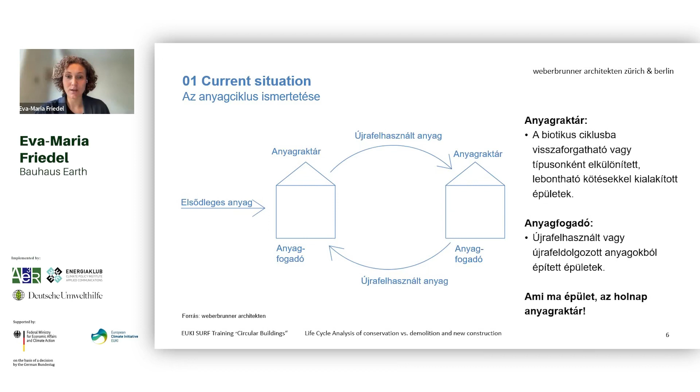Now about the life cycle analysis, I would like to show you how we were doing the calculation. There are a lot of rules and laws, and of course they are a bit different from country to country, but many things are also similar.

So the LCA is the life cycle analysis, or also life cycle assessment. The aim is to take a holistic view of buildings, of the entire life of the materials - production, operation, maintenance and deconstruction. It can be considered in relation to 13 indicators, but in this study we were focusing on the global warming potential, the GWP. We were also thinking about the carbon storage for bio-based materials, which is very interesting because you could store carbon in buildings for a while.

We didn't consider the operating energy, so it's just the focus on the construction, and the observation period of building life was 50 years, which is also a rule for the German LCA. In Germany, we have the ELCA tool, which is an open source tool, and there you can make the LCA based on the data sets of the Öko-Baudat.

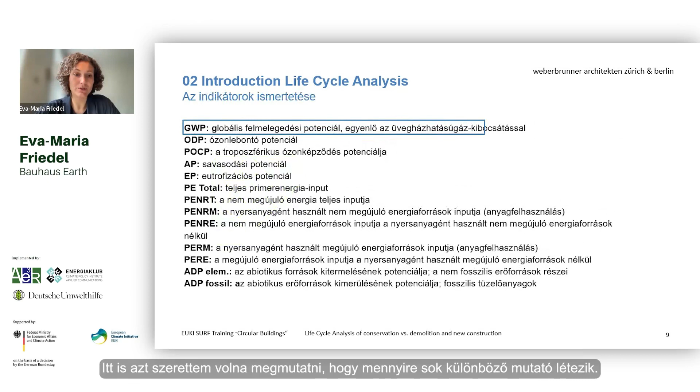Here I wanted to show you again that there are a lot of different indicators, and we are just focusing on the first one, the global warming potential.

Something important when talking about life cycle analysis are the modules. You see module A, which is the part of the production. Then module B, which is the use, and module C, which refers to the end of life. And also we have D, which are the credits and loads of reuse, recovery, and recycling potential. In Germany, we are focusing on the ones which are black when doing the calculation. The others are considered apart, but not included in the numbers we'll see later in the presentation.

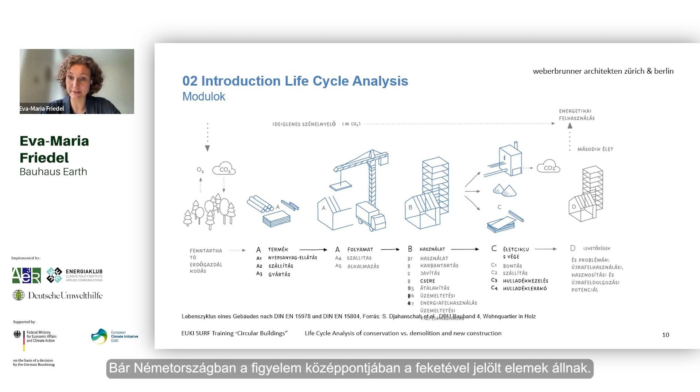Now coming to the example of this life cycle analysis of the facade refurbishment. This is the building we were analyzing - a very high, 9 story building in Berlin. We have high fire protection to think about because it's such a high building. It's a brickwork construction with sand lime bricks, and at the moment it's uninsulated. The gross floor area is 12,600 square meters, and the facade area around 7,000 square meters.

There is also a thermal insulation standard we have to reach, which is more or less 0.2 watt per square meter Kelvin.

So then we were focusing on different scenarios. The first one was the demolition of the existing facade and a new construction of the conventional facade. You have to think we were just focusing on the facade, but of course it's something you can also scale to the whole building - in the end we have numbers which you can compare. So that's the first scenario - what happens if I do a new construction with conventional material?

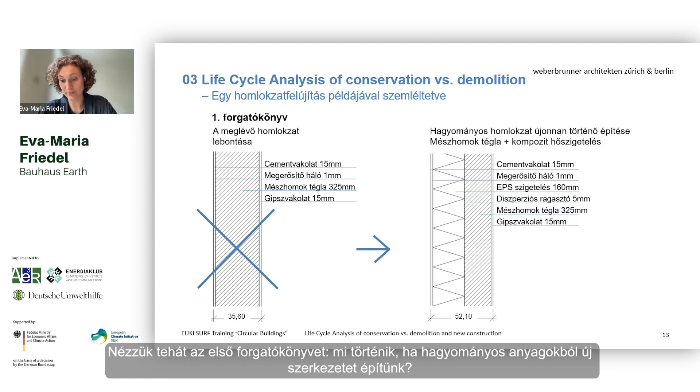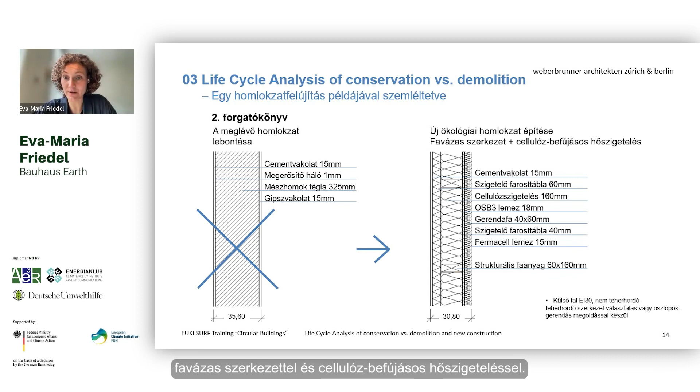The second scenario is I will demolish the existing facade and put a new building, but an ecological facade - a timber frame construction with cellulose blow-in insulation. Scenarios 3 and 4 were what happens if I do a refurbishment instead - I let the old facade stay and put a new insulation in front of it. Scenario 3 is a conventional refurbishment, for example with styrofoam, and scenario 4 is a complete bio-based construction.

Here you can see the results of the LCA, of the global warming potential. The first two are very, very high. In the gray you see the gray emissions the old building or facade already has, and the red one on top is for the new construction. In the refurbishment scenarios, you see that you can save around 79 to 89% of the carbon dioxide emissions.

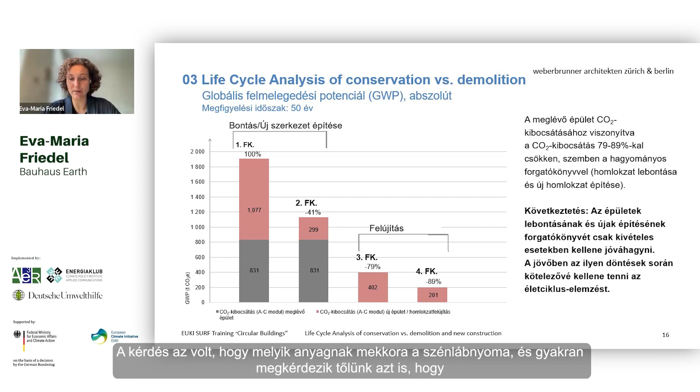The demolition and new construction emissions were so high comparing to the refurbishment, we then focused on different scenarios of the refurbishment. So what material has which carbon footprint?

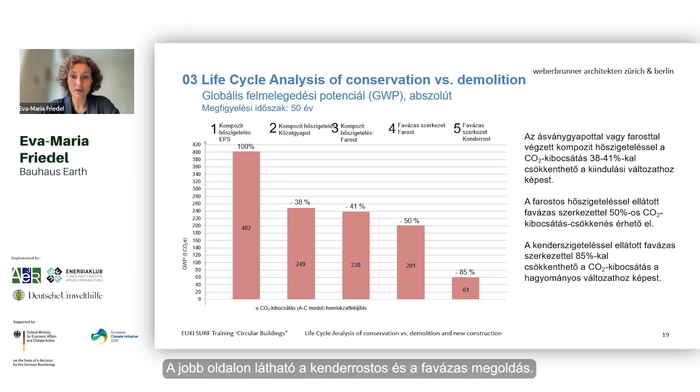We were focusing also on the carbon storage capacity, not only the global warming potential. In scenario 1 and 2, you don't have any carbon storage capacity since we have just synthetic and mineral materials. In scenario 3, you have a bit because we have the wood fiber in the facade. And in scenario 4 and 5, we have a lot of carbon storage capacity, like our timber frame, which can store carbon.

Then we compared the 5 different refurbishment options across different indicators. First the global warming potential, then the carbon storage, the cradle to cradle, so can we put it back easily to the circularity, and then also the ecology, so are there any glues or pollutions in the materials?

On the left side, we tried to evaluate this with a traffic light system, and you see that everything is red. So the composite with the styrofoam has a lot of carbon dioxide emissions. We don't have any carbon storage. It's very difficult to recycle and reuse the materials because we have this composite which is glued. And of course, we also have a lot of pollutions in the different materials. In Germany, it's very common if you have styrofoam and all these glued materials to put it sometimes to landfilling and not recycle it anymore. Especially this is also the case with rock wool.

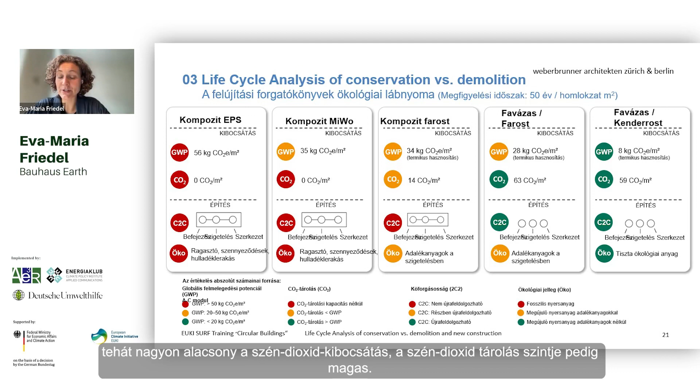On the right side, you see the bio-based solution, and here everything is green. We have a very low carbon dioxide emission. We have a high carbon storage in the materials. We can reuse it if we are thinking in plugging, doweling, and screwing when we are doing the construction. And also the hemp is a pure ecological material without any additions.

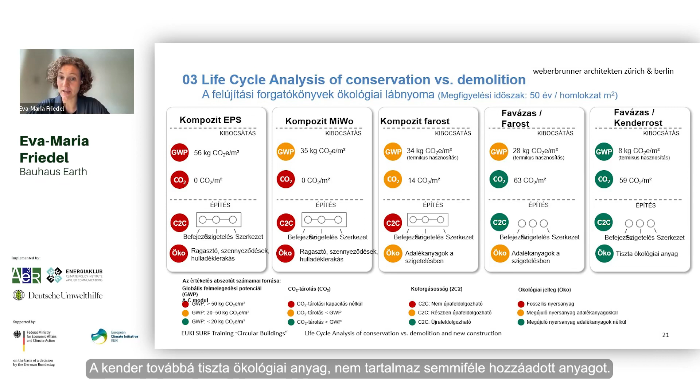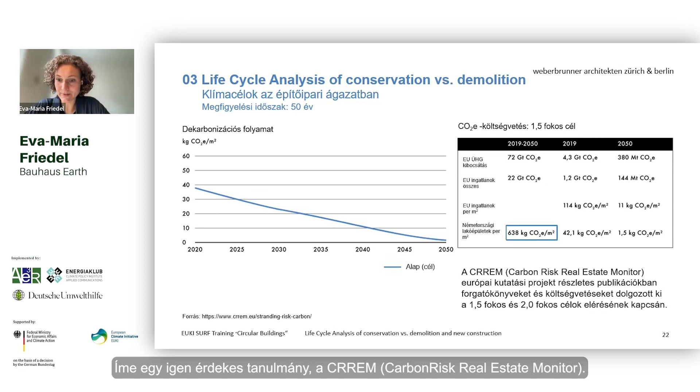So then in the end, as already mentioned in the introduction, we want to try to be climate neutral in 2050. This also, of course, refers to the building sector. There's a very interesting study, the CRREM study, Carbon Risk Real Estate Monitor study, and they were focusing on different scenarios for how to reach the 1.5 degree and the 2.0 degree goals. It's possible to get the number for residential buildings in Germany, which here is marked in blue. The calculation says that between 2019 and 2050, we still have 638 kilograms CO2 equivalent per square meter.

And of course, this graphic is falling, so every year you have less. In 2019, you have 42 kilograms CO2 equivalent per square meter, but by 2050 we already have to be more or less climate neutral. With this base, we tried to compare our facade solutions and put them against the 1.5 degree goal.

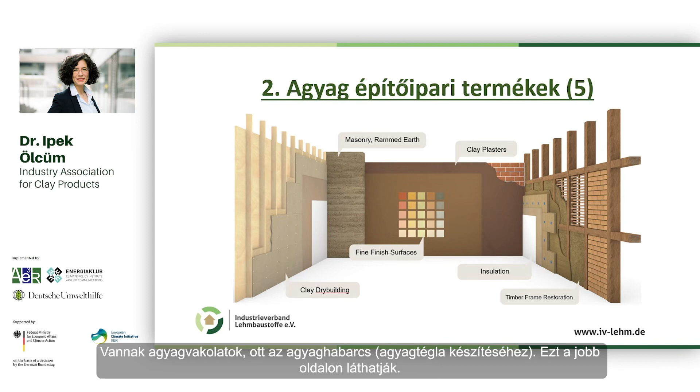You have this view into a room where you can see all the materials you can use: clay dry building, masonry, rammed earth, fine finish surfaces in any color you want - we prefer the natural ones because you don't have to add anything else to it. Then you have clay plasters, clay mortar to use clay bricks which you can see on the right side, and clay building materials for insulation.

Eva Maria talked a lot about timber frame - you can use clay in timber frame restoration, but also for new construction buildings in timber frame as well, very well. So it's not just restoration. In all of these fields, conventional building materials are well known, and we're trying to get the sight into clay building materials.

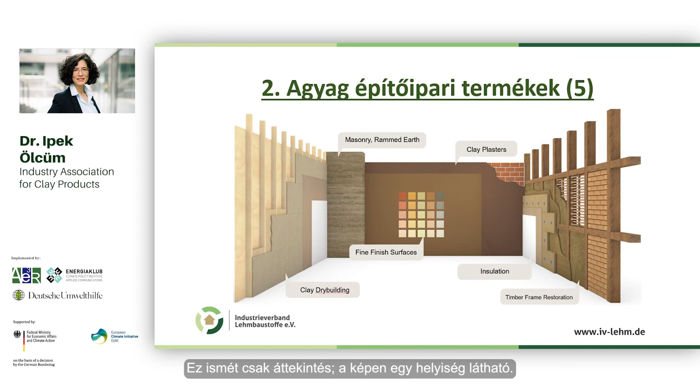This is again just an overview, just a view into a room. So there are a lot of variety of clay buildings. I would say there are 5 main products. You saw already all of them.

In Germany, that's the point where I would like to recur: you have clay stone and clay brick, and clay brick is standardized in Germany. You have the standard DIN 18945. Very important is that the products are always air dried, so you don't have a burning process, which is very high in emission. So you can use the bricks, which are air dried, inside and outside.

We have a load-bearing code according to Eurocode 6, which says that you can build buildings in Germany with 4 floors up to 13 meters high. You have for sure standards again for plaster and mortar. Clay paint is not standardized, but you don't need that.

Clay dry building is the green alternative in drywall construction. We are there, we need to be seen. The timber construction industry sees us. We have a lot, you have something to do and to change in the German regulation to get our place as an alternative in the field of using dry wall constructions.

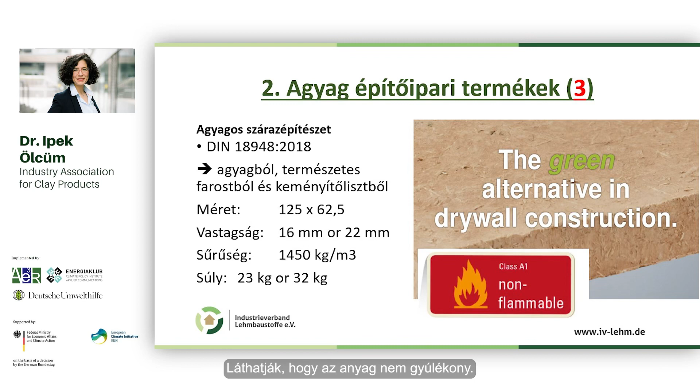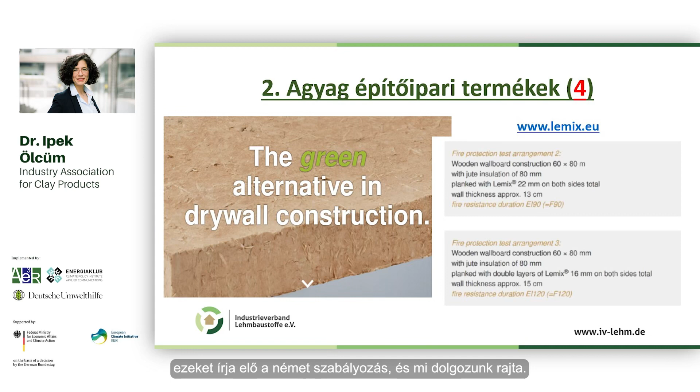You can see we are non-flammable. You can see here further some arrangements made by some companies of us about the fire resistance duration. You have the fire resistance duration EI90 and EI120 tested. We need some tests more. That's what the German regulation asks for, and we are on it.

Why we should use clay building materials: as I showed you already, all the materials which you can use when you build up or when you renovate buildings - you can show that on 2 hands. We are very low in energy according to production procedure, because we are air dried. We are recyclable, reusable as well, regionally available, German-wide and Europe-wide, and I would say worldwide.

Sound absorbing is one of our construction physical advantages. We are moisture regulating. This is a real point where timber construction and clay products go very well hand in hand, and you can see that in buildings built all over the world 50, 100 years ago. You have the pollutant regulating factor of clay products. They are heat storing, and they protect from heat in summer because of the heaviness of these products.

So here just a few success stories. This is the Federal Ministry of Agriculture, Food and Consumer Protection in Berlin. And they use dry building, about 4,000... 2,000 square meters of dry building.

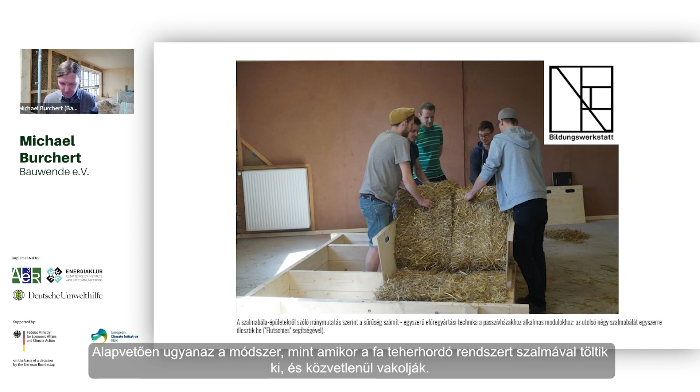The trick is to make it gapless and settlement free by using pressure. You actually don't need any tools for that, you can use tools, of course, but you don't need this. And the trick is to have a density of around 100 kilos per cubic meter. This makes it very safe. And here you see engineers training in our practice hall, learning this.

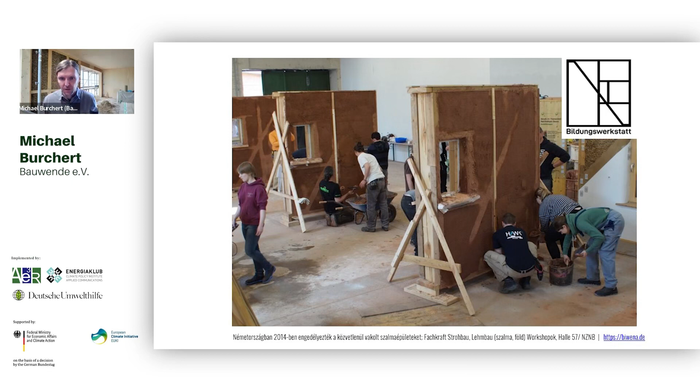Yeah, it's directly plastered, that's a trick. This is the air and wind tightness.

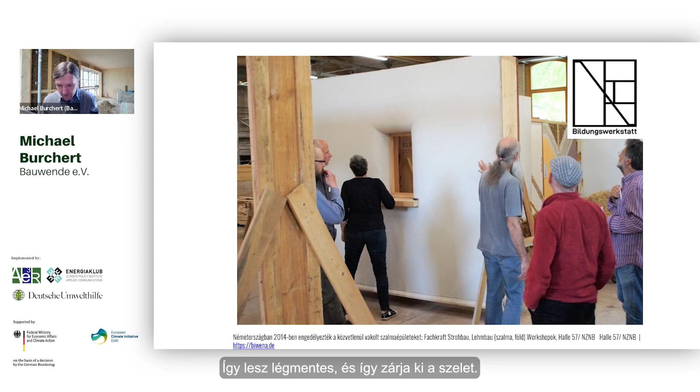Here you see the finished building. This is the North German Center for Sustainable Construction. It's 5 stories high and it's built with straw, clay, earth, and lime.

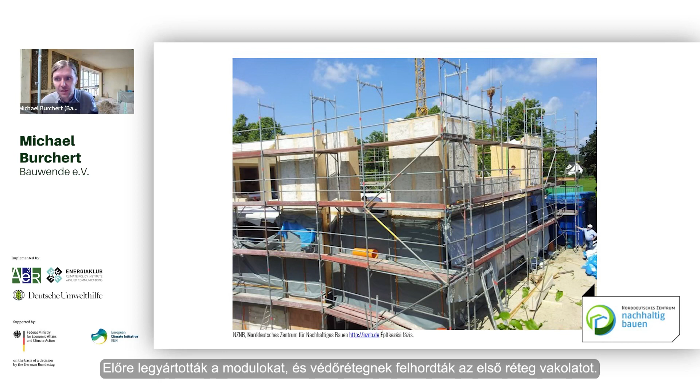And this is how it's made. You saw the pictures before where the students were practicing this. Here, 2 guys were practicing in the same hall you saw before. In 2 months, they built the whole house. Basically, they prefabricated these modules, and they applied the first layer of plaster, as you see, as a protection. And it's just stacked over each other, and boom, there's the finished house.

I mean, it's very easy. It's very easy to build, very fast, if you know the trick.

So yeah, we also showed this for the last maybe 10 years or so, also in vocational schools around Germany. We have thousands of people that can basically do this. We had 2 days with hundreds and thousands of people usually, and basically this is ready.

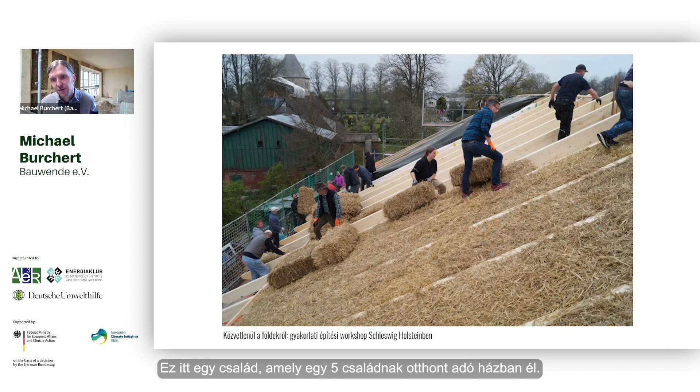And we also did this on training on actual construction sites. This is the builder's family from a 5 family home. They helped after a brief introduction, like 45 minutes or so, and they can do this in a quality way, and it saves a lot of money actually.

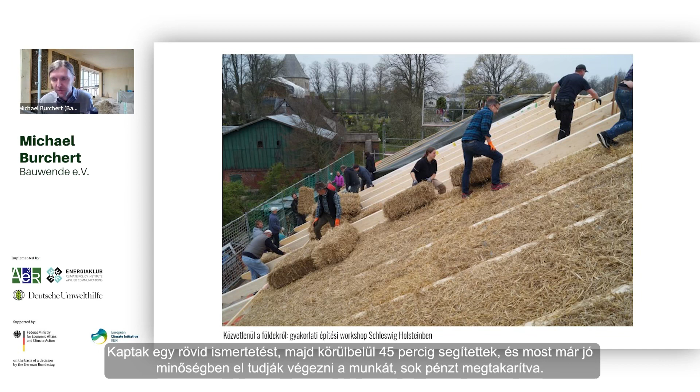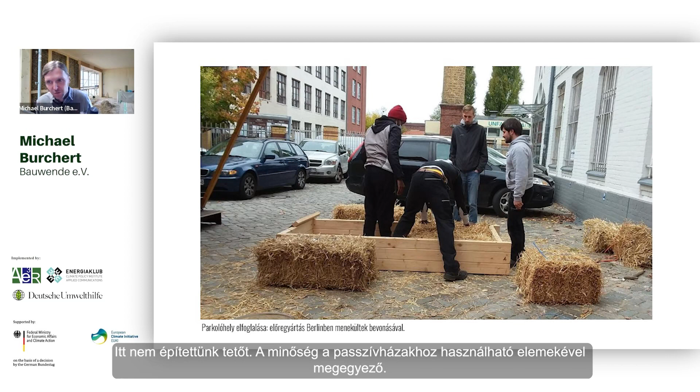Here we did this in Berlin on the street with refugees, like occupy parking space, right? Just no roof and quality passive house ready construction.

And why are we doing this with straw? I mean, there are so many construction materials, right? But we have problems, right? Our budget is actually our climate budget for 1.5 degrees is actually depleted in 3 years in the EU and UK together. So we have to act, and we can actually.

I mean, you see it behind me. This is an old technique, and it just works, and it gives super high performance buildings. And yeah, still why straw?

There's so many other ecological things around, right? Yeah, but the best building material is the one that does not have to be produced. It's already available. That's a trick. And it's everything there, not just the material, also the research is done.

I mean, it's passive house ready, it's certified. You have all your whatever heat bridging and so on. Everything is there in detail. You even have your BIM models ready. It's almost completely open source, this technique, and it's super ready.

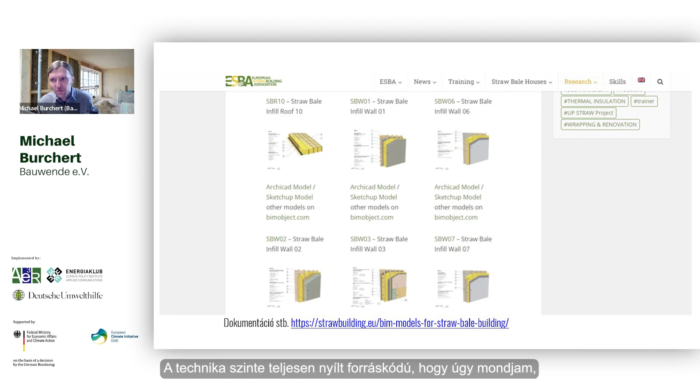Yeah, but for those who can't build with straw, don't worry. Other plants have also beautiful fibers, right? There are a lot of plants worldwide. We saw hemp already. But if you look at whether we have enough - this was a question from the chat as well - I have to say yes, we have enough, but not from all species. Let's put it that way.

And well, we have a lot of woody, not wooden biomass, but woody biomass, which I mean straw and hemp and so on. This is basically also woody biomass. It's the same, basically the same as timber from the forest. It's also cellulose, hemicellulose, and lignin and other stuff.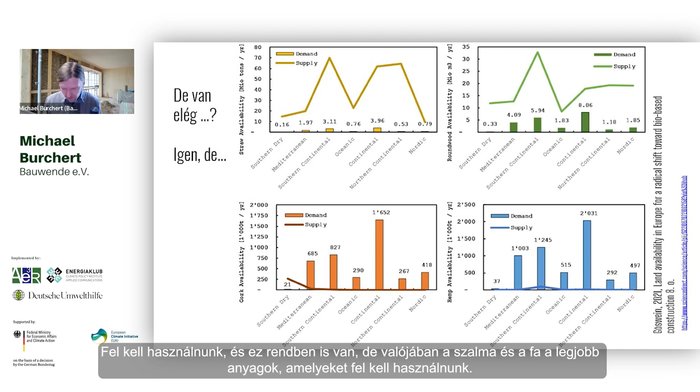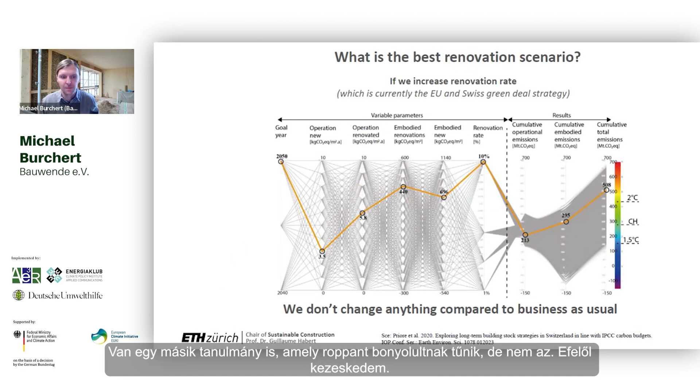Now, so here's homework for you. You get the presentation afterwards. You can look at your national straw potential. I prepared this document. Yeah, another study looks super complicated, but it is not. I guarantee you. This is by Guillaume Habert.

That's a great guy from ETH Zurich. He looked at how Switzerland can stay within its 1.5 degree budget. And he looked at construction, obviously, and he looked at the business as usual scenario, and you see that it goes well beyond 2 degrees, so it fails.

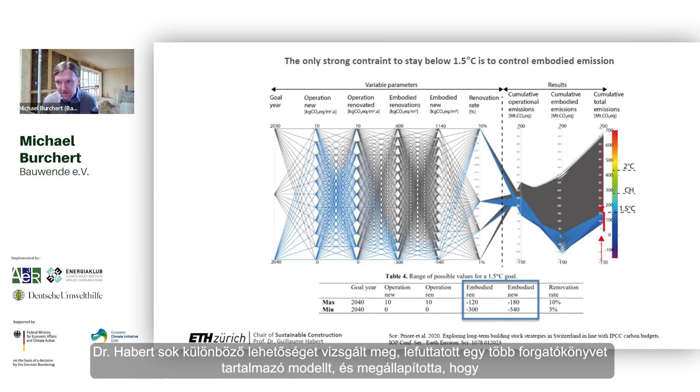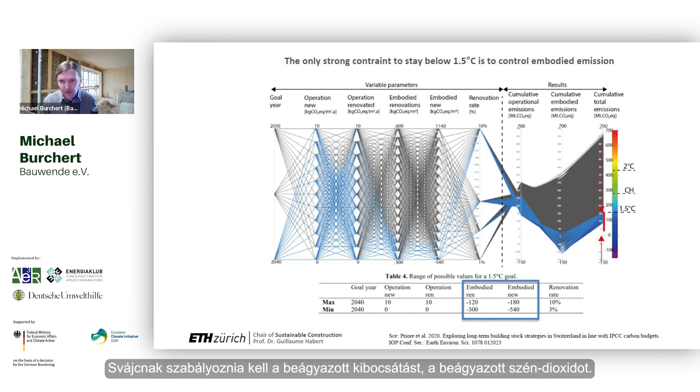So if Switzerland continues to build and renovate like that with usual materials, it doesn't work. So he looked at many different options. You see this is very complicated. He ran this model with several scenarios and so on, and he came to the conclusion that Switzerland has to control its embodied emissions, embodied carbon. There's no way around it, you have to limit that. So how can we do that?

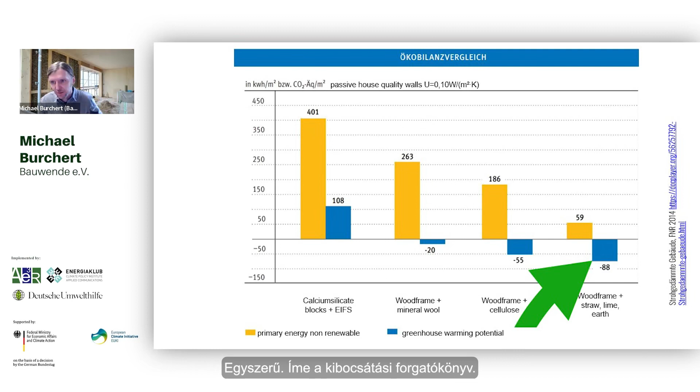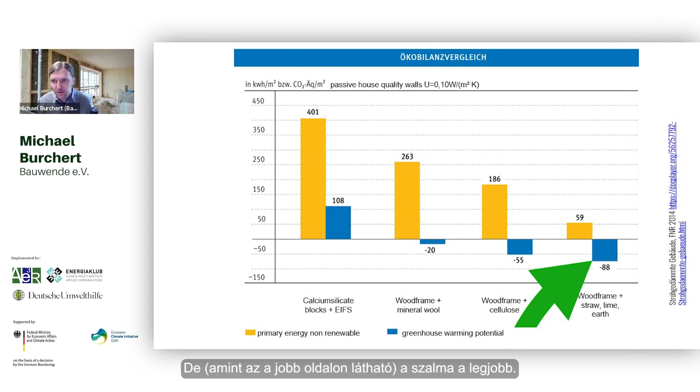We can ditch the bad stuff and go to the best performing things. This is pretty easy, I mean a child would come to this conclusion. We have this emission scenario, they go up, and we focus on the things that go down. You have several options, but straw is the best one, as you see on the right. You have 88 kilo sequestration, storage, CO2 storage in the building.

Hemp does this as well, but there are some differences there. This is not optimized for sequestration, by the way, you can store more. And this is also with lime, which is emission as well. This storage thing is interesting because when you have negative emissions, or let's say climate positive - there's a bit of a bad wording there - you can use these emissions directly in the building to offset things. Maybe, I mean, we can discuss this.

You can even do an optimized reinforced concrete building and have super thick walls to compensate for that - 1 meter thick walls to compensate this. I mean, do not do this, do it rather with timber. But timber is also just not really a climate positive material, at least mass timber is not, at the moment. And you have to compensate this with 30 to 60 centimeter straw bales, which is okay - this is a normal straw bale size.

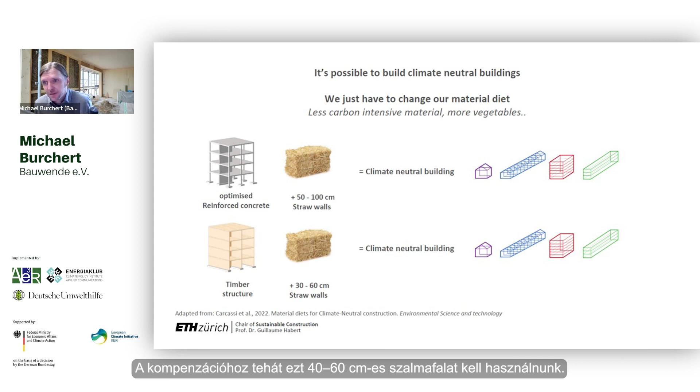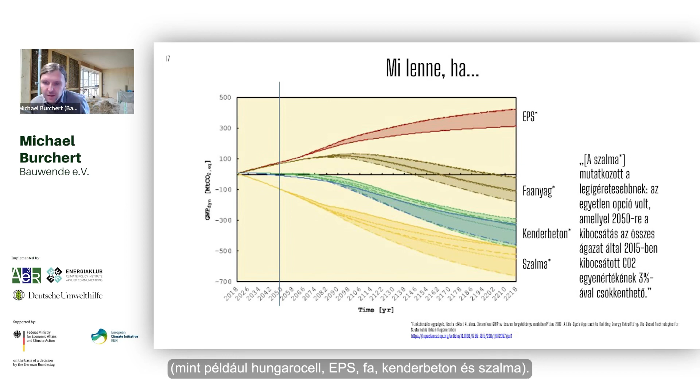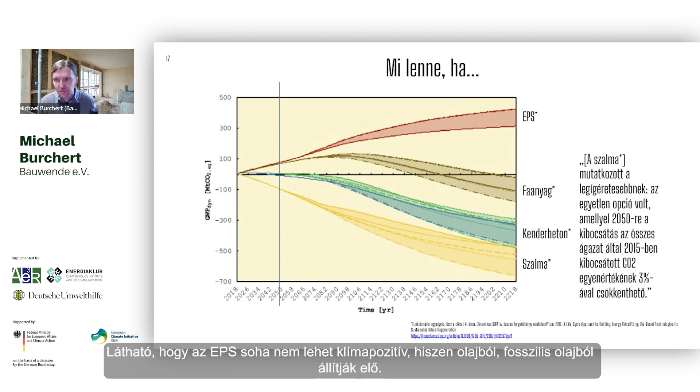And here you see that EPS can never go climate positive because it's just an oil product, a fossil oil product - it's just emission. And you look at timber, this is the brown thing, and you see it dives under zero very, very late - I mean 2150 - because a tree obviously needs to grow back to its former state. It takes a long time.

And you see that hempcrete is neutral, let's say, for almost 100 years, and then it starts to dive really, really good. This is because there's a large lime part of this, and straw doesn't have that. It can have that if you do a plaster and so on, but you don't have to. And straw is directly positive, so to speak, after 1 year, because its crop grows back, like hemp.

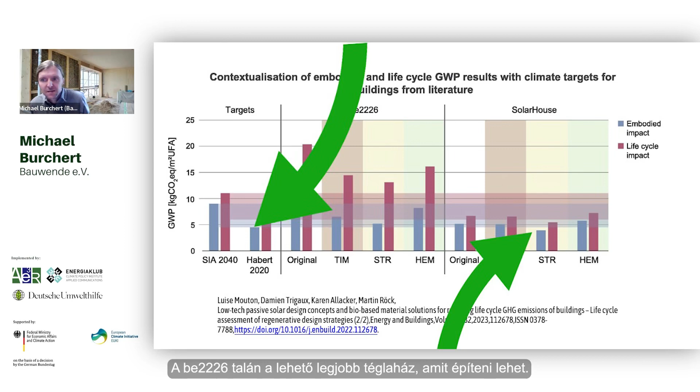Another study - I don't want to bore you, but this is really interesting stuff. We have two buildings compared here: the be2226 and the solar house. The be2226 is maybe the best brick house you can build, a brick house. These are larger houses, multi-story. The be2226 doesn't need heating, and the solar house is a straw house. So, and the first bars...

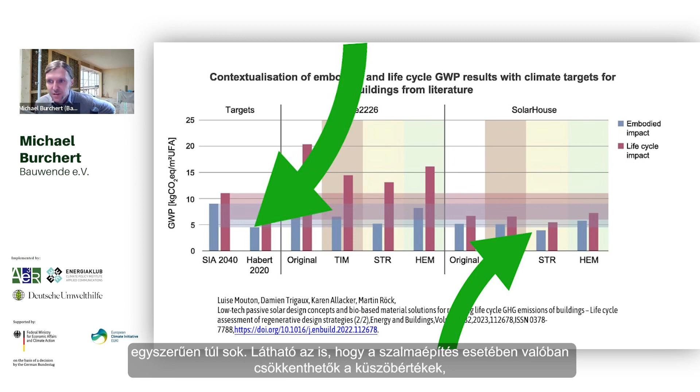Guillaume Habert did research on what the sustainable budget for construction, for new construction, should be, and he found these values to be in line with sustainability. There's also the SIA target, a Swiss target for limiting embodied carbon and whole life carbon. You see that the brick building, the 2226, is too high - the best massive building, basically with fired brick, can't achieve this. This is just too much. And you see that for the straw building, you can actually lower the thresholds - you can even go below that.

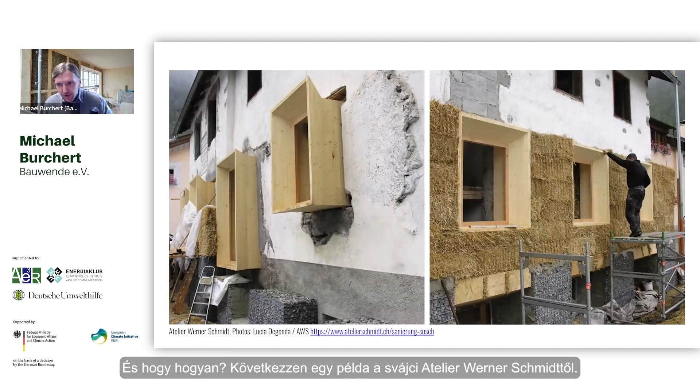So, how to do that? Here's an example from Atelier Werner Schmidt in Switzerland. You can do it like that - just put the bales at the wall. This is called wrapping, and it's plastered, and boom, you have your passive house wall. This is great for summer and winter performance. This is a usual bale, and these are very thick ones. I guess these have around 16 hours - they add 16 hours of amplitude dampening, so you won't ever have a temperature higher than 23 degrees or so in summer, even in a heat wave.

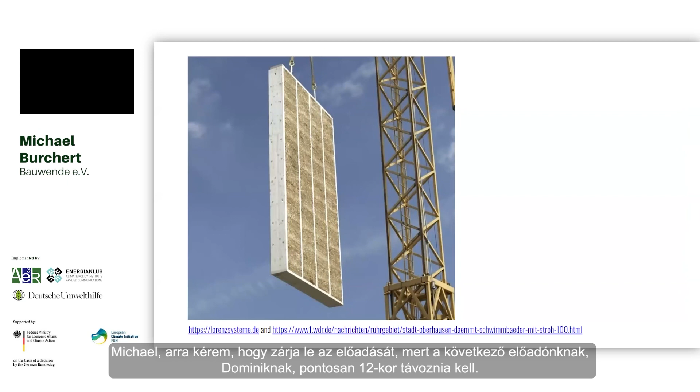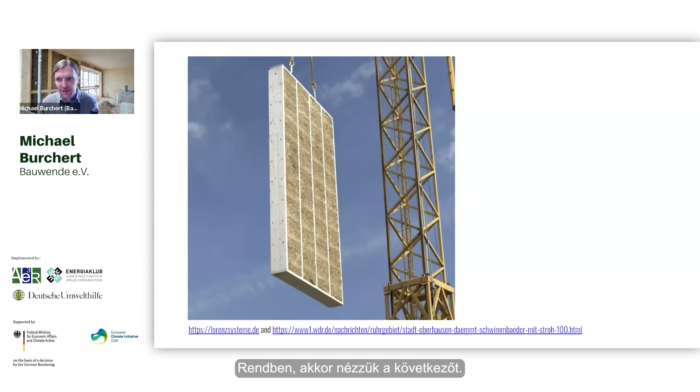Okay, so I will just hop through the next one. You don't have to do this by hand—you have a lot of prefabrication already. You can really order your panels, as you see. This is Oberhausen, where they retrofitted 5 swimming halls with this, easily. You can see it's just bolted on, and there you have your swimming hall.

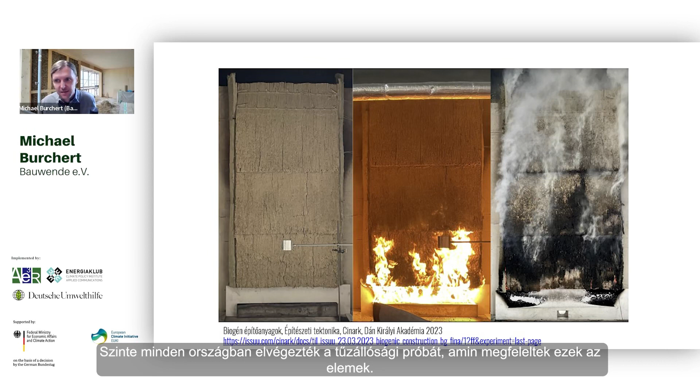Here's in Paris, 3 kilometers from the Eiffel Tower. It was retrofitted, just strapped on with belts, tie bands from logistics, and plastered. This is fire tested in almost every country, and proven.

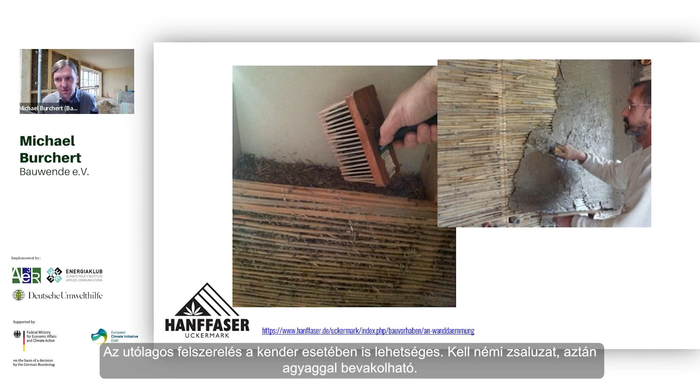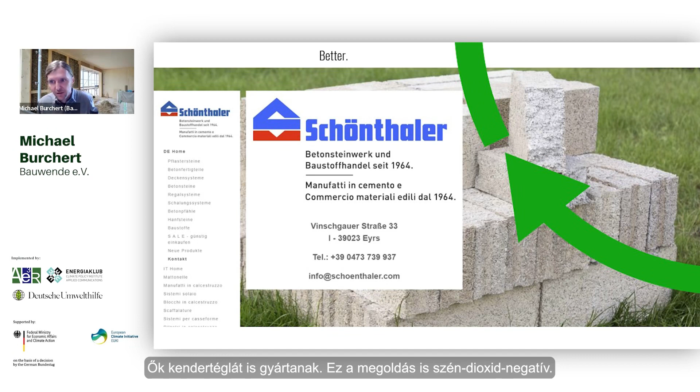You can retrofit with hemp, obviously. Just have some shuttering there and plaster over it with clay, and you're good. You have your industry that's also ready—your concrete industry, they do hemp bricks, no problem. Where's the problem? Same infrastructure. It's carbon negative as well.

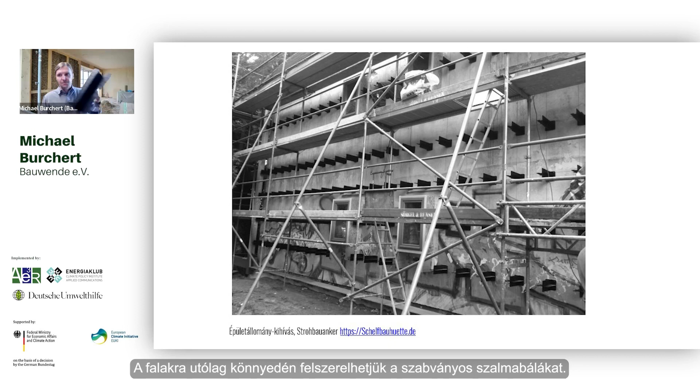You can have your WDVS, your external wall insulation system, plaster over it, ready. You can have your walls easily retrofitted with bales, standardized. I have this console here that you can screw on the wall, and you are good. This is pretty easy, it's pretty doable.

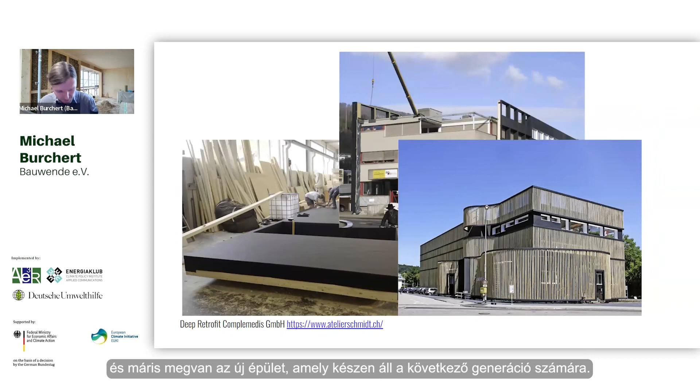This is the finished house. Or do a large scale industrial retrofit—just do large modules, crane it in place, and you have your new building ready for the next generation. Thank you.

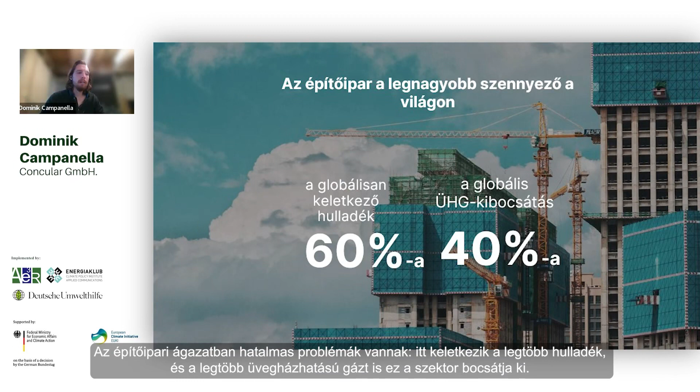The problem, I think, was explained already quite often before. We have a huge issue in the construction sector, as we have the highest amount of waste and also GHG emissions. The big issue is the waste principle, right? We take resources out of the earth, we produce materials, we put them into buildings, and sometimes after just a couple of years, we take these materials, which are really high quality, and we throw them away or we downcycle them.

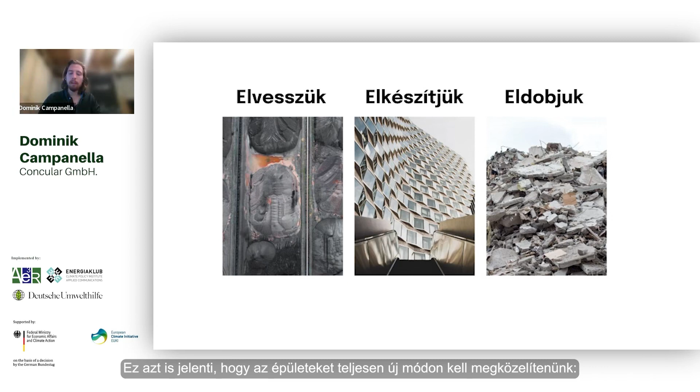This cannot be the case anymore, because we have to change—we have to think in circles. That also means we have to look at buildings in a completely new way, as a source for new products and new buildings. And as already mentioned, we have to actually follow the circular economy principles.

We discovered that already more than 10 years ago. And what we thought was, okay, on the one side, buildings are getting deconstructed. On the other side, we need these materials for new construction. So why not match supply and demand? Why not build a marketplace where people who have materials as leftovers from deconstruction can put it in and others can buy it? So we founded Restado, and we built it as the largest marketplace for circular construction in Europe.

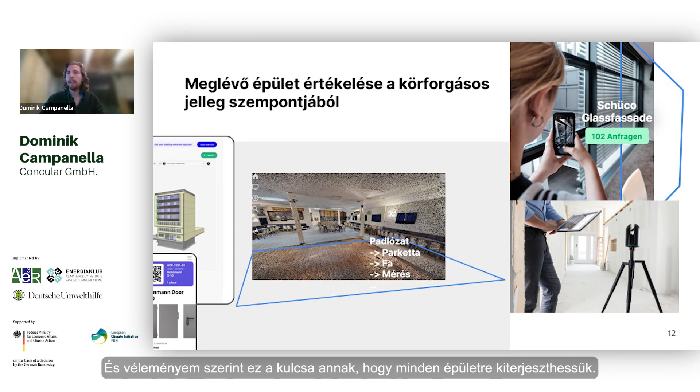But the big impact also lies in existing buildings. So how can we reduce or digitize materials in existing buildings? For that, we developed software which you can put on your phone and go through the building. We also do 3D scans, really looking with a 3D scanner and a kind of computer vision algorithm at what materials are in a building, and then automate this process. Because when you think about digitizing materials in existing buildings, that seems to be a large task. But with software, you can reduce this complexity and make it very simple. And I think this is key to scaling it to every building.

And then in the end, it comes down to data, right? So what we did at Concular was to build a large database, also partly from ÖkobauDat, a German database where we have a lot of information about how much GHG emissions, or different kinds of emissions, are used in the production of some materials, so the embodied carbon, but we also have data about the circularity.

And what's a really interesting aspect is when you take these materials and sell them at the end of the lifetime of the building, instead of paying for landfilling, you make something valuable out of the cost. So you can actually make money with the circular economy. This is something really interesting.

When you put all this data together, you have a really good picture of what kind of materials can go where. Because when there's a renovation or deconstruction happening, we match the supply of all the data with the demand of manufacturers, recycling companies, building owners, and so on, to really close the material loop. And now, of course, a big point is also, can we do that from the construction site to the next construction site?

This is often not the case. I mean, we are working a lot with manufacturers. We're taking it on their side, refurbishing it, and then selling it again. But sometimes this is also not possible.

This is why we strategically now go from the digital space also into the physical space, creating so-called urban mining hubs. So we opened one here in Berlin, which is 1,000 square meters of storage facility, in cooperation with Alba, a disposal company here in Berlin, and also the Senate of Berlin. And we will open many more of these facilities in Germany to enable us to circulate even more materials. These storages are also completely run digitally.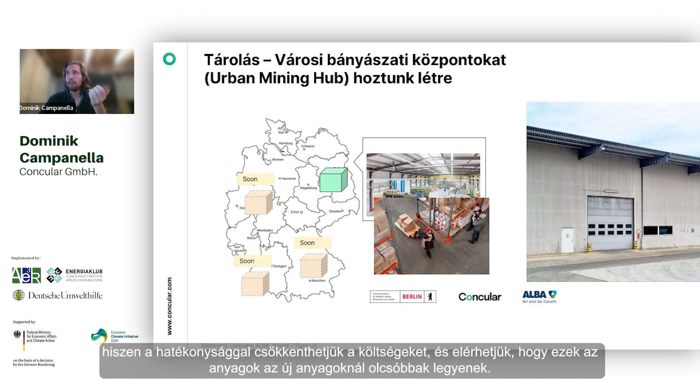So we have a software behind it, which is connected to our system to have no friction in between, to make the process very efficient, because with efficiency you can reduce the cost and make these materials cheaper than new materials, but with the big advantage that they have much less CO2.

Now, this is all nice, and this is what we've done at Concular, but we want, of course, that others are doing that too. And this is why we created a DIN norm, or DIN spec, for it. It's called DIN spec 91484, so-called pre-demolition audits, where we standardize the whole process of what I just explained. It's free to download, everyone can just apply that principle. It's also available in English, so you can just search for it and download it in English.

This is what we've done with 30 stakeholders in the construction industry, a lot of universities, but also practitioners and so on. And with that, there are two purposes. One purpose is that others can just do it also. But the second purpose is, in Germany, you can just demolish buildings without any permission, and I think this is not good. We have to really check before demolition, is there really a reason for demolishing a building, and what from the building can we really put back in the circle again?

So this is where this DIN spec is going into, and the plan for that DIN spec is to make it also a European norm. Of course that can take a while, but I think this is a first good step.

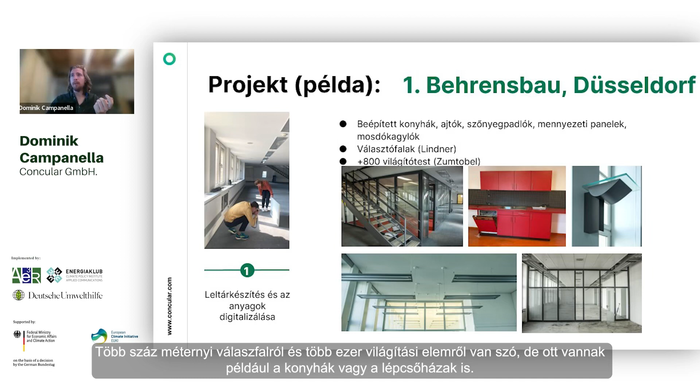So a lot of the materials were digitized. You can see, of course, because it's interior material, we have a lot of partition walls, we have a lot of these lightings, hundreds of meters of partition walls and thousands of lightings, but also things like kitchens or stairways and so on. And then what we did was go to all the manufacturers and create take-back systems with them, especially Lindner.

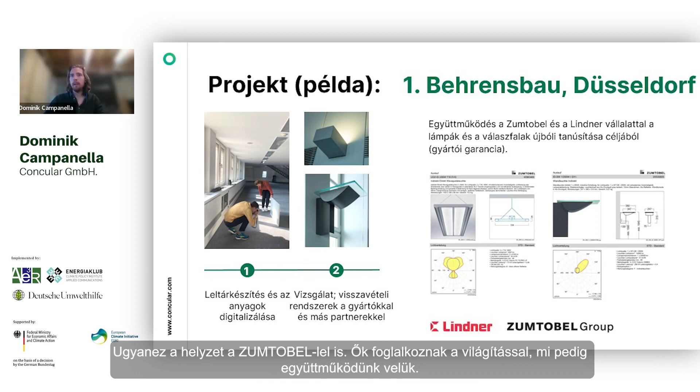Lindner has its own production line for reclaimed construction materials. They take these materials, refurbish them, and sell them again. It's the same with Zumtobel, who does the lighting. Working together with them and ensuring good quality, we were able to put it on our platform.

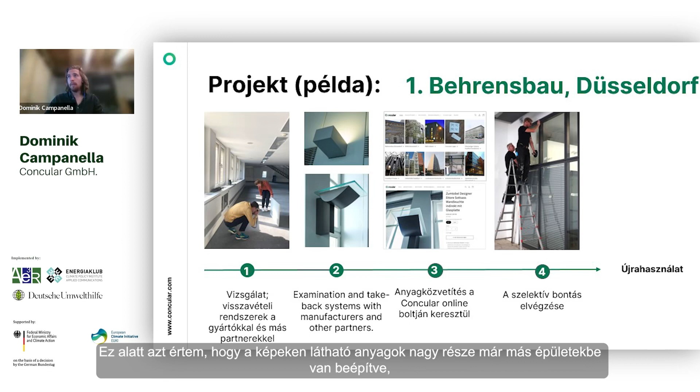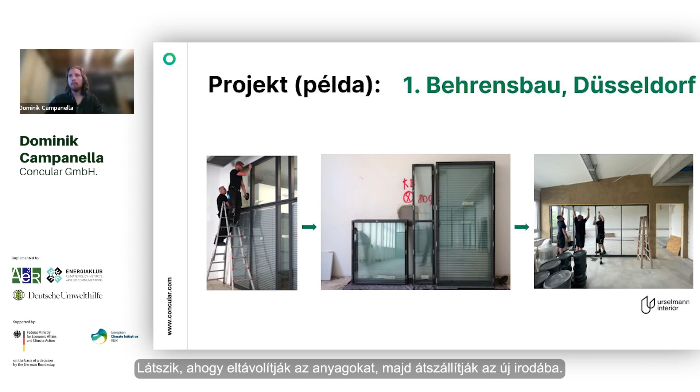You can also see how these materials were then put into another building. Most of the materials you just saw in the pictures are already part of other buildings now, which I think is a really big win. For example, here is how they put it out and transport it to a new office. You can also see how kitchens were put into new buildings, or these doors which were used, unfortunately not as a door anymore, but at least as something to sit on.

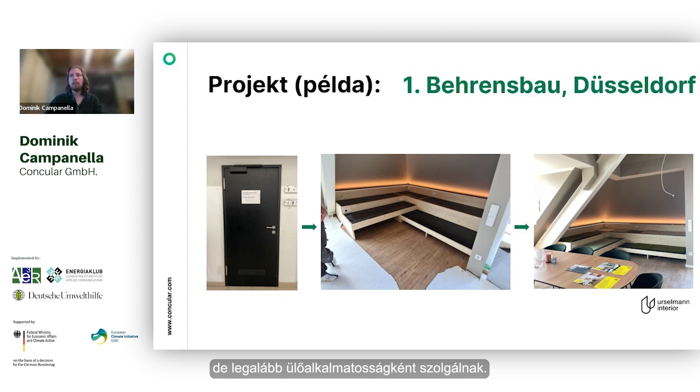Another example would be a discount supermarket chain we work with in Germany. For all their supermarkets, they always have the same wooden structure, and these wooden structures are quite good. What we do is put them out. Some of these wooden beams you can use as wooden beams again, but some of them, how to say, cannot be used directly again.

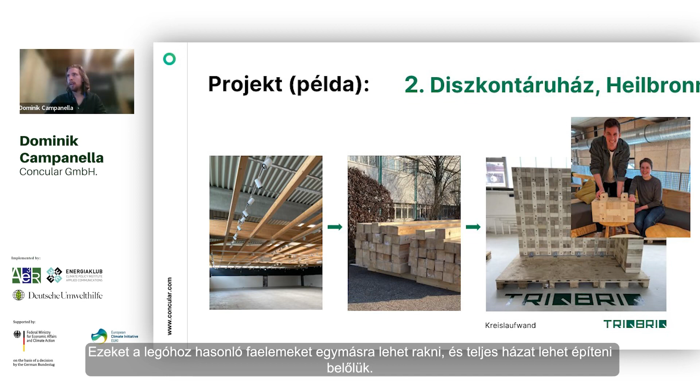So what we're doing is working together with a company called TriQBriQ, and they make so-called bricks with that material. Basically it's like wooden Legos which you can stack. Then you can build complete houses with it. So out of these wooden beams, a house was built. The really good thing is that you can just take them out - if the house is not needed anymore, you can take them out as Lego stones and use them somewhere else. From sustainable materials like wood, we give it a second life as a new product, and it can be used again.

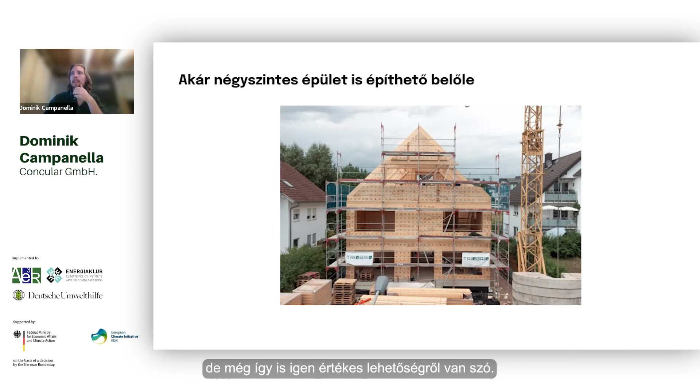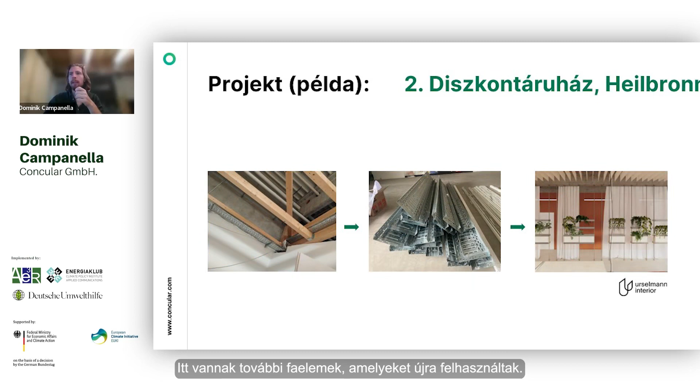This is, I think, a good example. Of course it would be best to use a wood beam as a wood beam again, but this is also a possibility for high value use. You can also see that other stuff was made out of the wood, and these were also used again. So everything that was part of it was used again.

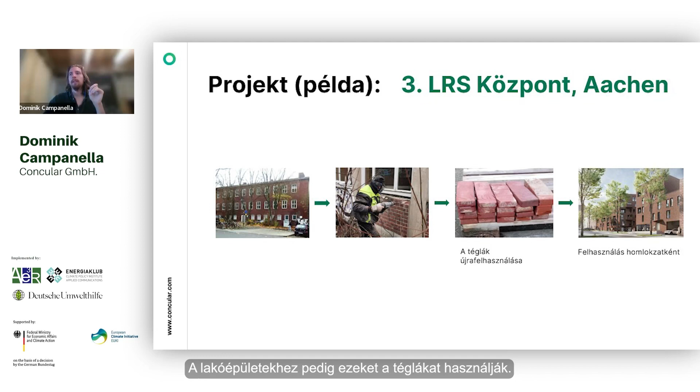But we also do not just interior stuff, but also outside. For example, this school had a lot of bricks - I think 20,000 bricks. The bricks were taken out of the school, cut as tiles, and then put on the same spot, because they demolished the building to put residential buildings there. Now the facade of the residential buildings is based on those bricks.

But you can also do a lot of interesting stuff if you have a digital inventory of the materials. This is an example of the Karstadt Hermannplatz, a department store in Berlin, a very big one, 40,000 square meters. We went in, digitized all the materials, and it will be renovated. They created a competition for architects: these are all the materials already in the building, plan the renovation with these materials. You can see some of the materials that were part of that. The competition entry that used most of the materials again won the competition, and it will now be renovated based on the materials already in the building.

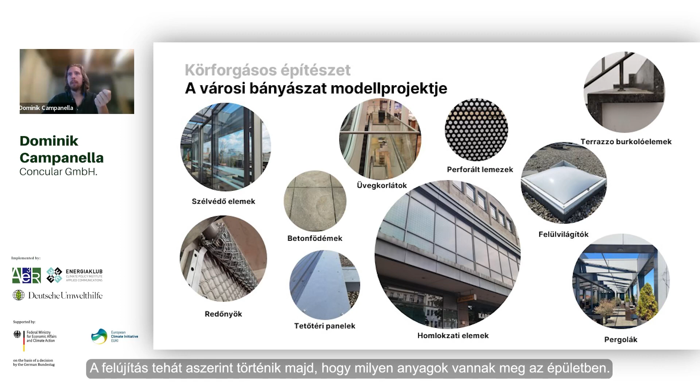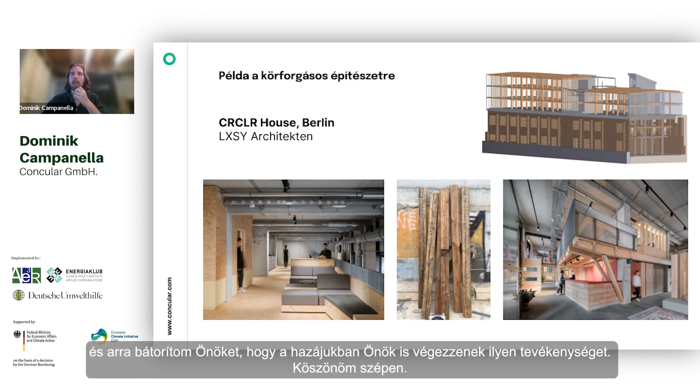With that, I hope I could give you some examples of what is possible with digital tools, and encourage you to do that in your countries as well. With that, thank you very much.